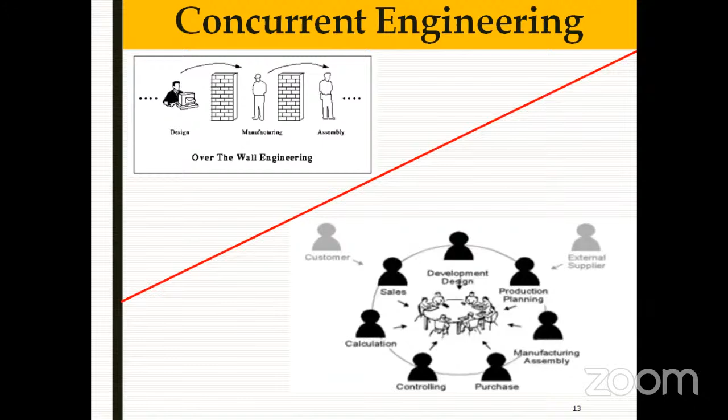So the next step would be, if I have selected some idea or design, I would do prototyping. Prototyping helps us in a lot of things. Apart from communicating, we can predict performance, we could have a touch and feel of things, and it could be used as an aid in enhancing creativity.

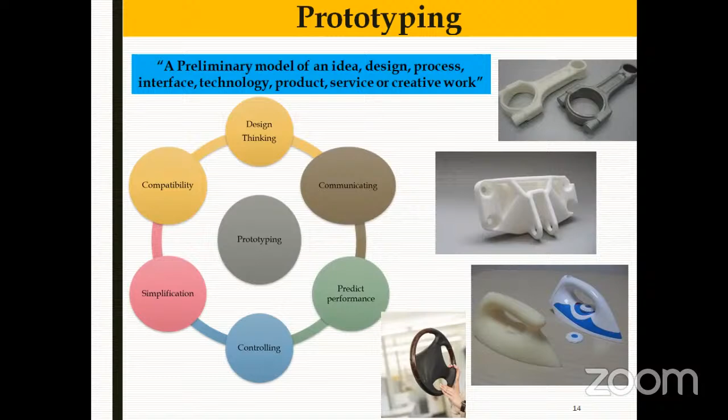If you have a product in hand and you are asked to give solutions to different problems, parallel ideas, it could help you. So what we call design thinking, or maybe simplification, the compatibility of different assemblies and sub-assemblies can be checked by this prototyping.

So if just to sensitize, or to have an idea how this old design process is different from the new design process, let me give you an example. In our times, when people were communicating by telephone, there was an evident need that there should be something wireless, so that people can carry it. So the need for a mobile phone or a wireless phone was evident, and everyone knew that there should be something which is wireless and mobile, so people could talk and walk.

After that, in our times the internet was there, so people could communicate, could email each other. Then there came some social networking sites. Orkut was a very old social networking site in which people could post their comments and ideas. But then Facebook was, I would say, a refined version of Orkut.

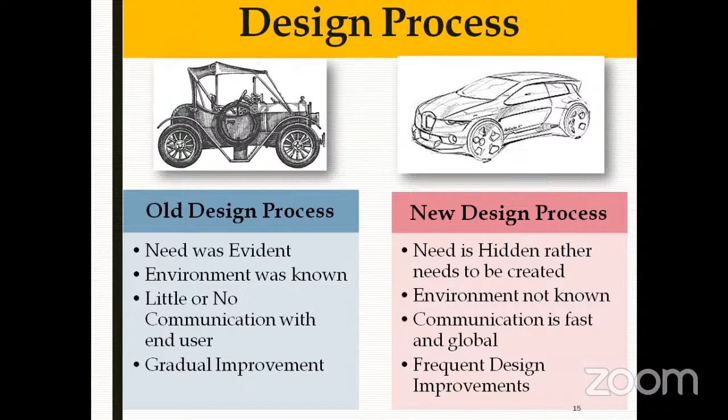One more important aspect of design or new product development is biomimetics. When we talk about biomimetics, it is actually aping nature. As we all know or believe, nature is the best designer. So if we could find some lessons from nature when we design something, that helps us develop great products.

Modern engineering is basically somewhere inspired by some natural system. If we somehow try to incorporate these natural systems in our design, that would be a very great thing. I would introduce some aspects of 3D printing, because earlier, the manufacturing of these complex shapes and structures was a challenge. But now, with the advent of 3D printing, developing complex shapes and structures has become very easy, and taking lessons from nature is also easy.

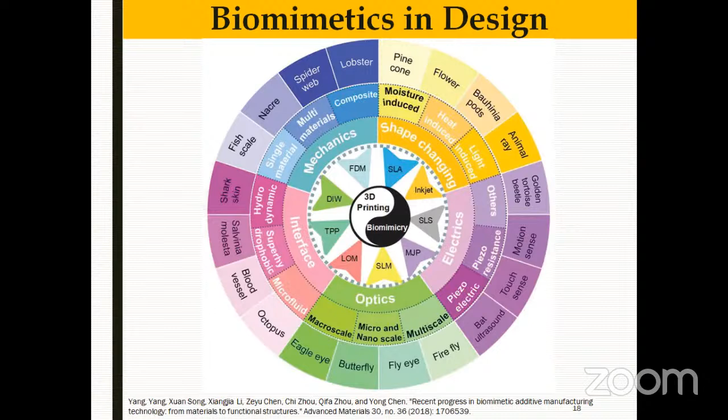What we are suggesting, as these authors have shown in this diagram, is that if we augment 3D printing and biomimicry, we could take a lot of lessons from nature, and we could introduce a lot of systems and subsystems, and improve existing products by augmenting the science of 3D printing and biomimicry.

Entrepreneurship, what I understand, is innovation driven, and it should have a short product development cycle. It needs capital, there's a huge risk, and it should involve less manpower. What entrepreneurship is about is bringing ideas to business.

When we think about these steps, and look at the recent technology of 3D printing, these could all be achieved by involving the concept of 3D printing in our designs and in entrepreneurship. So what do startups or entrepreneurs need? They need less material usage, less labor costs, less initial investment, easy maintenance, part replacement, and operation.

There is one concept which we call reverse engineering, or we may call it benchmarking also. What we do is examine competitive or prior products in detail by dissecting them and literally taking them apart, checking their structures, their functions, their operation, and knowing about the design — how does it work, why is the design like that. But I see that 3D printing can help with the issue of IPR, keeping those legal issues in mind.

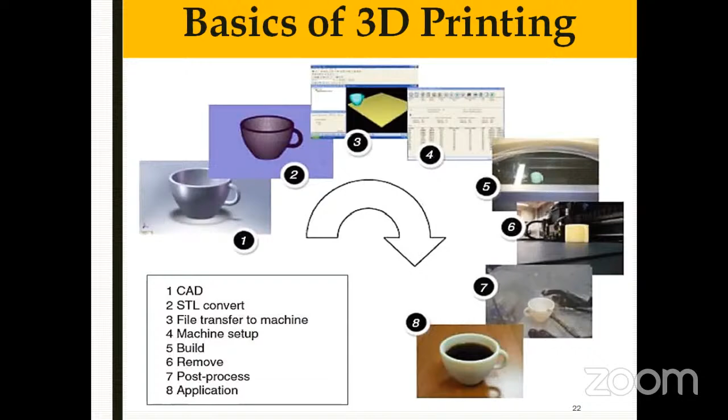Now, this additive manufacturing is actually about — we have a CAD which is developed in a computer. I'm trying to make it simple because I know there are people from diverse fields. So when we have a virtual design in a computer, we convert it into a different format which we call STL format, and then the 3D printing machine could develop the physical part out of that virtual design directly. So there is no material wastage. It can handle complex parts, and the speed with which it does it is also remarkable and economical.

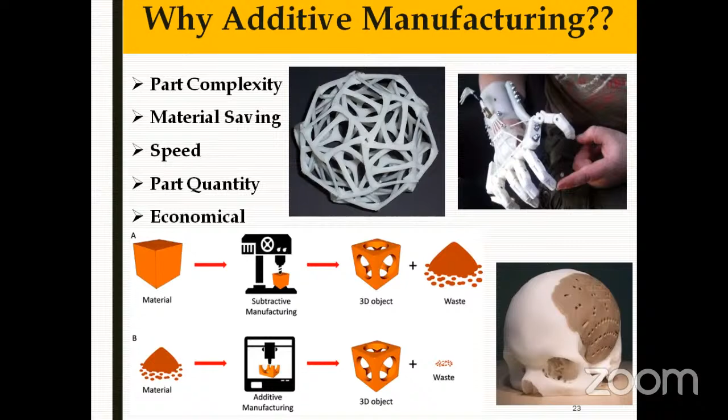In comparison to subtractive manufacturing, a lot of material wastage used to happen, but since additive manufacturing does it layer by layer, there is no wastage, or very little wastage involved because of post-processing. So why do we talk about additive manufacturing in design or entrepreneurship? Because it gives us complexity for free — there is no additional cost for complexity. Earlier, in subtractive manufacturing, designing intricate shapes used to involve a lot of cost. But now complexity is free because the manufacturing is a layer by layer process.

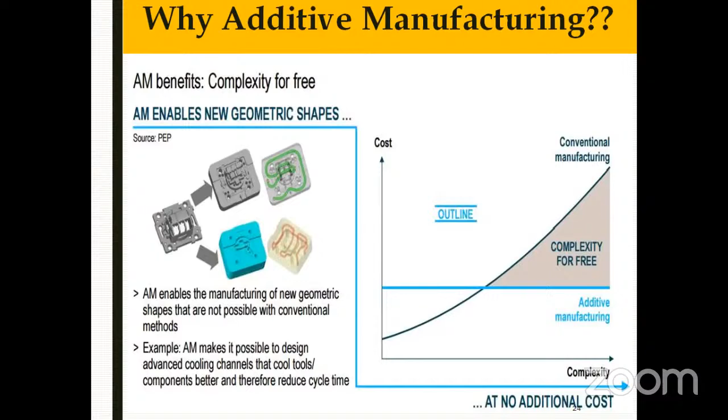So types of 3D printing, I would just skip it because I don't feel it's needed here.

So the total cost of 3D printing is also very less. If we see the supply chain costs, tooling cost, and production costs in totality, the total cost per unit part is also very less in comparison to conventional manufacturing. And a 3D printer could cost you just 15,000 or maybe less than 20,000 Indian currency, which is very less. As an entrepreneur, you could use this technology to bring new ideas to life without having tools or a particular assembly line.

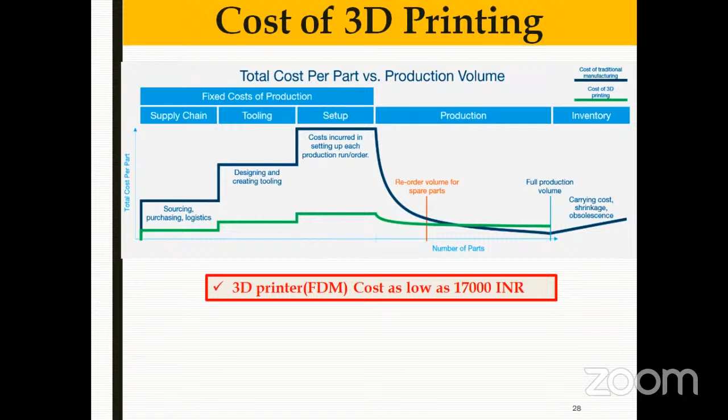And you could actually use this as a rapid prototyping tool to get a touch and feel of ideas.

And the future is that, say for example, you're in the evening or at night and you feel that the bristles of your toothbrush are worn out. You give a command to your 3D printer, like a paper printer at home, and in the morning you have a new toothbrush and you brush your teeth with it. So this is the future, and I feel that entrepreneurs can use this technology in new design processes, new product development processes, and they can bring small ideas to life without much investment.

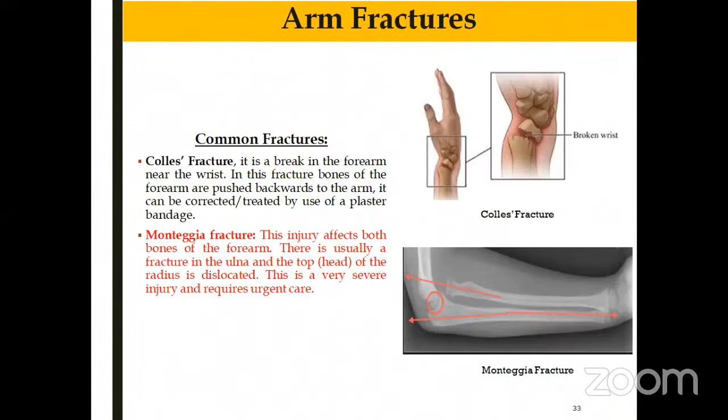It's a work which was done by some students who were in an undergraduate course in our lab. So we know there are fractures, and we have heard about fractures. There are two common fractures which happen, and maybe some of us may have faced this in our early childhood or youth. So this Monteggia fracture is very common.

And we used to see that people used to do plaster-based exoskeleton, which was non-water resistant and extremely heavy. It was cumbersome to carry. The issues of air ventilation, allergic skin reactions, and dullness of skin were there, and it caused irritation due to accumulation of sweat.

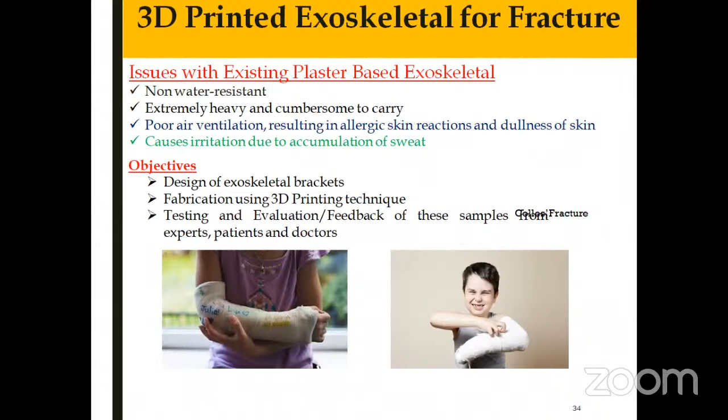So what we thought as a team, that this is the gap we will address, and we will design a new exoskeleton bracket by using 3D printing. And this was actually the need. So then we did testing and evaluation by experts and doctors. So we designed a new exoskeletal bracket by using fused deposition modeling, which is a technique of 3D printing.

And we could see that the new design - we gave some holes for air ventilation, and it could avoid compartment syndrome due to less force on the immobilized bone, and the mobility of proximal and distal joints, which was not the case with the plaster-based exoskeleton. And due to this lightweight design, the range of motion of the distal joints also increased.

Then we assessed our different designs, because we designed 3 to 4 different designs. Then we assessed our designs on the basis of level of comfort, ease of joint movement, air circulation, muscle support, design, aesthetics, gripping, and locking mechanism. And then we got input from different doctors and patients.

And then this is one important example where we have to make decision making, because decision making is also a very important aspect in entrepreneurship or in new design process, because you may have n number of ideas and you have to decide which idea is the best.